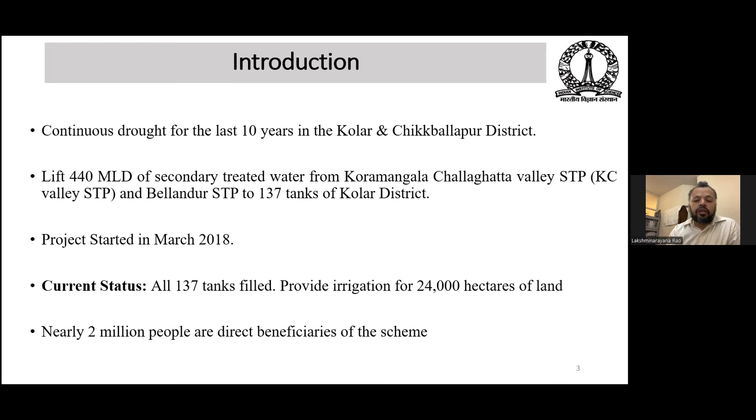Nearly 2 million people are direct beneficiaries of this scheme. There's a big impact because water has been flowing there, and it has had a big impact on the people. So what is the scheme?

There are two STPs here in Bangalore. Water is pumped through a pipe network to this first discharge chamber called the DC point, which is about 100 kilometers away. From then on, it either flows through gravity, or wherever gravity is not possible, they pick up the water from here and bring it to the highest point.

Most of the water flows in open channels starting from this DC point. Wherever such options are not available, it is pumped in pipe networks, brought to the highest point, and from there it flows in open channels from tank to tank.

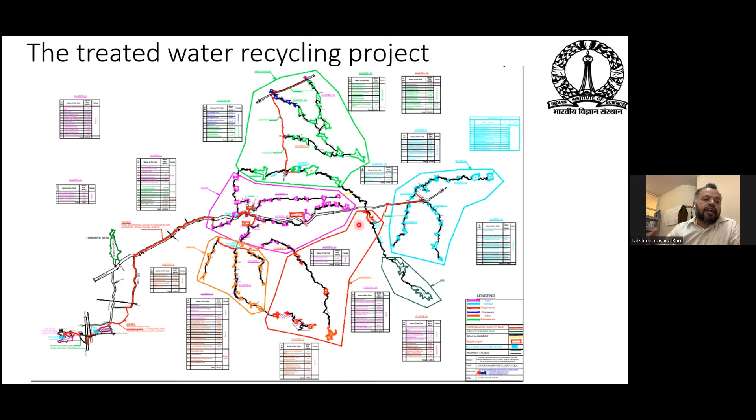The project is located - here is the map of India, we are in Karnataka, and in Karnataka there is this district called Kolar. A major portion of Kolar is fed with this treated water, which is stored 24/7, 365 days of the year. So water is available, and you can imagine the impact this has on the groundwater table.

The objective of this project is to ensure that this water, stored in these tanks, is used for indirect recharge of the groundwater table, not for direct use. A lot of precautions were taken to educate people that this treated water should not be consumed directly, but should be consumed after being picked up from bore wells neighboring these tanks. Here is a picture of that.

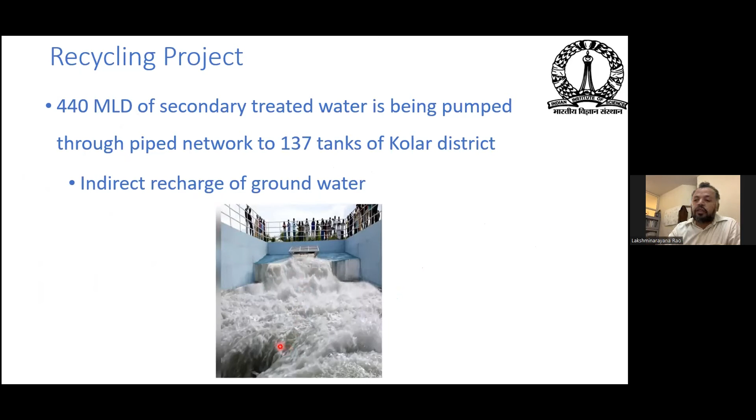So this objective, as I said, is indirect recharge of groundwater. This is the DC point, the discharge chamber, and you can see the treated water flowing from one tank to the other. These are some pictures of tanks before - that is the first tank, called the Lakshmisagara tank, and this is how it looked before the water had arrived.

So it was completely dry. Here is the DC point, you can see on the picture on the right, and the water is flowing and filled up in this tank. The overflow from this tank goes to the downstream tank, and it continues that way. So in this picture you can see the first tank, another tank, the third tank, the fourth tank and the fifth tank. It keeps moving from one tank to the next, and depending upon the capacity of the tank, the residence time of the water in these tanks is different.

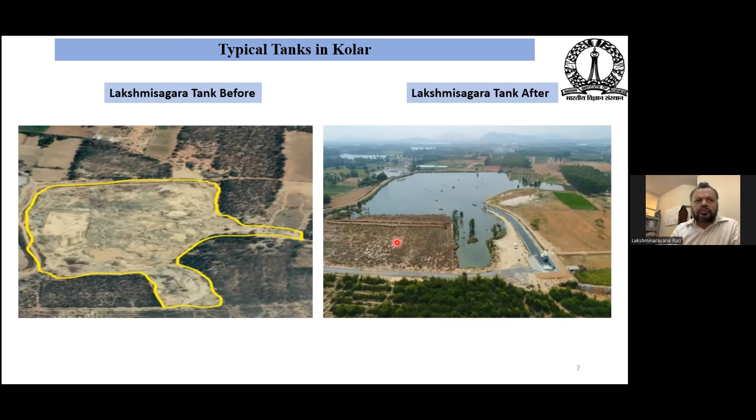This helps natural groundwater percolation and eventually increases the groundwater table, and also the quality of the underground water. Here is another picture where you can see some lilies growing in the tanks.

What was the standard of quality of the water being filled? When we started this project, there were 2 STPs, and the STPs were not up to the mark. This was a discharge standard set by the National Green Tribunal for the discharge of treated water to surface water bodies. They were really concerned more about the nitrogen and the phosphorus. So the standard was total nitrogen should be less than 10, and total phosphorus measured as PO4 should be less than 1. That was the very strict standard set, obviously to avoid eutrophication of these tanks.

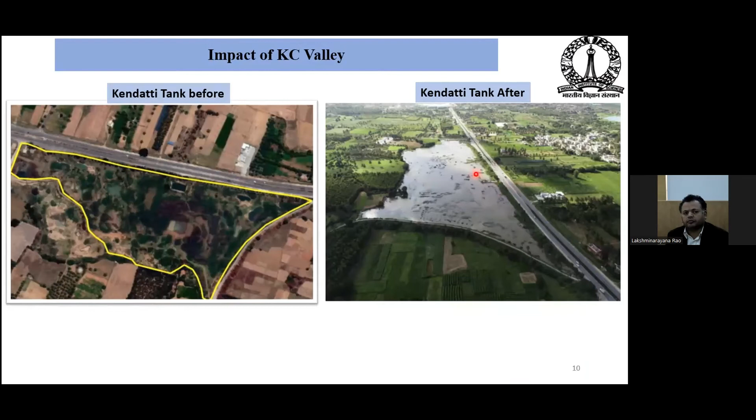One more picture of another lake, Kendatti Lake, before and after. Here are some of the pictures of the impact of the KC Valley project on the flora and fauna.

So the tanks are now filled with treated water, because of which the underground water table has increased, because of which a lot of migratory birds have come back, and it is promoting tourism.

People have stopped growing eucalyptus, which was being grown, has been uprooted. Now people have gone back to growing vegetables. Instead of having 1 crop per year, now they are having 3 crops - the farmers are doing 3 crops per year. They are back to growing flowers, vegetables, fruits, and even paddy is starting to grow, which is a water intensive crop. So these are also being grown.

Some more pictures of it, some herons. These tanks are also auctioned off to the fisheries department so that they can do fish cultivation in there. So people are also doing fishery in these tanks.

What you see here is the change in groundwater levels because of the storage of water in these tanks. What you see on the x-axis is the number of years - we have monthly borewell data. This is from a borewell which is close to Narasapura, which is one of the 5 tanks in this cluster.

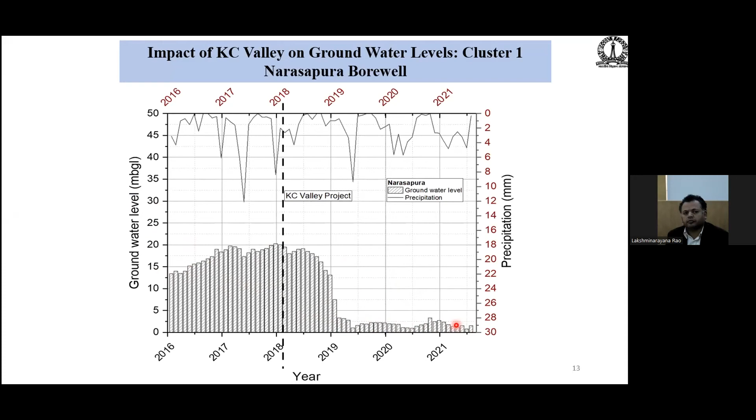And this water remains constant for all the months of the year. So there is no change in the water level, indicating that the groundwater is being continuously charged with the water which is stored in this tank.

Before this project, there were areas in Kolar which were more than 2,000 feet below. People were picking up water from as deep as 2,000 feet, so they had multi-staged pumps which they were putting in to pick up water from those depths. The cost of water was very high because they had to pick it up from such deep levels. Also the water quality was very hard, so they were getting a lot of dissolved salts in that water because they were picking it up from such low levels.

Now the water quality has improved. I don't have the monthly data yet, but I've seen some data which has just started to come in. The water quality has also improved because of the dilution effect coming in from this KC Valley project.

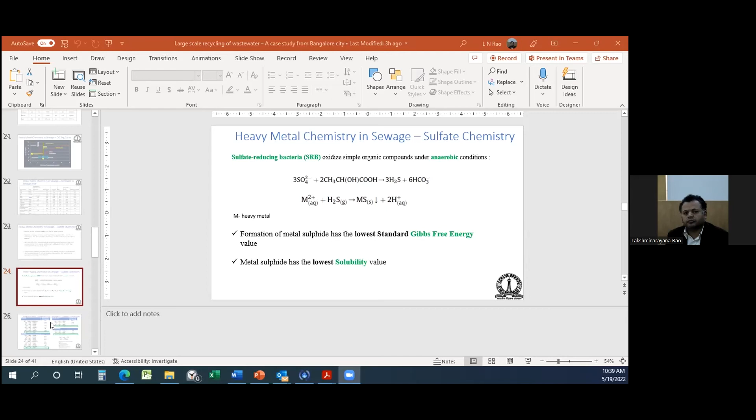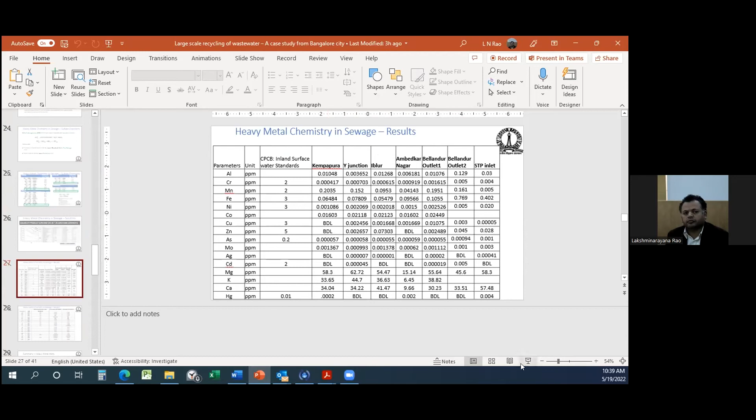We went ahead, and here is one example of that sulfate reducing bacteria doing it. Then we went ahead and really showed it for all the inlets. These are all different points. What you see here, I'll just show this one, you can see here for all the heavy metals which are listed in the inland surface water standards. We showed that even the raw sewage coming in will be very, very low, and the STP inlet itself will not have, and the STP outlet definitely will not have, any heavy metals. So this was shown to the courts, and they agreed, and then they started letting the water in.

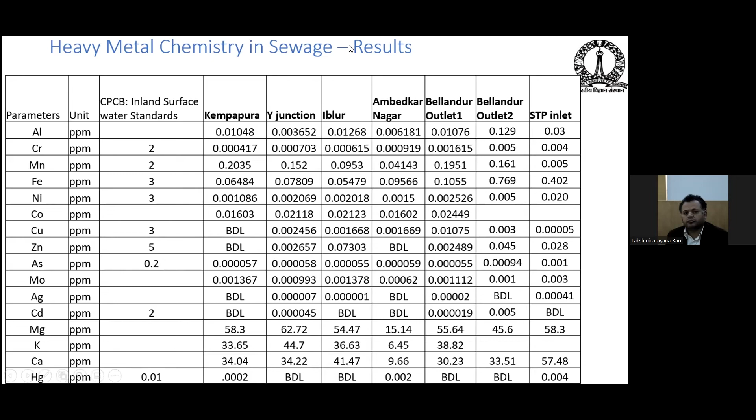Once the water started flowing in, once they began seeing the advantage of this project, now there is a lot of demand for the water. So there is a lot of internal fighting, theft of water, all kinds of stuff happening to really get more water from it. So the challenge was the initial apprehension that this water might not be very good and might contaminate their groundwater. Once that apprehension is removed, now the challenge is how do we manage it, because they want more water. Everybody wants water, and now people are doing all kinds of stuff to steal this water, divert channels, put bunds, and all kinds of things. Everybody wants water now. The government also recognizes that, and now they are embarking on phase 2 to fill 272 tanks, which will start in the next year or so.

Dr. Rao, it would be great to also answer a few more of the questions, because we have several coming in. There is one question about whether there is a charge to the villages for the pumping. No, the pumping is free, so there is no charge.

Even as a matter of fact, there are two government departments associated with this. One is the Minor Irrigation Department, who are in charge of picking up the water from Bangalore and delivering it to the tanks of Kolar. Then there is another department called the Bangalore Water Supply and Sewerage Board, who are responsible for collecting the wastewater from Bangalore city and treating it. So there is a lot of argument that the MI department should pay some fees to BWSSB to treat this water. But the government has said, okay, we are in the same umbrella. We don't pay for fresh water coming in from Mysore, where drinking water is picked up. So water is free, nobody pays, no charge.

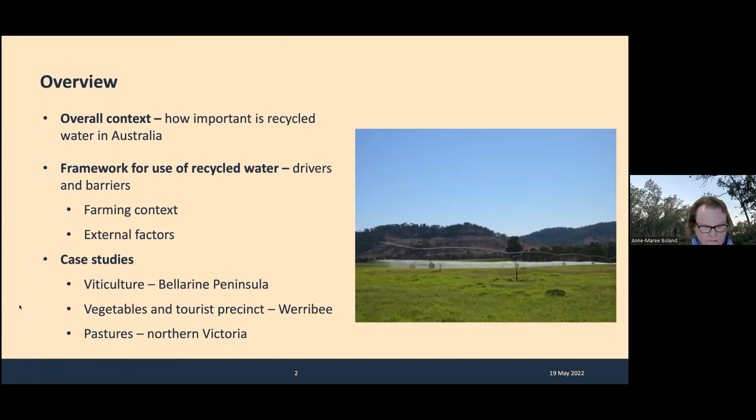So just to touch on - first of all, sorry, I'm just having trouble getting it to go to the next slide. Okay, just to touch on recycled water in Australian agriculture.

We have a very large and significant irrigated agriculture sector, and a lot of that is from either rivers, surface water, but also groundwater, and we have large irrigation schemes. The total volume of irrigated agriculture water used in the last ABS accounts, which was 2019 to 2020, was about 7,230 gigalitres. This has been declining over time, particularly with a lot of that water moving to higher value crops. So you can see from 2014 to 2015 up to now, there's been quite a decrease in the amount of water that's been extracted from the environment, and also delivered in our irrigation systems.

If we think about the recycled water side of things, we have about 312 gigalitres of treated effluent that's been supplied, and of that only about 86 is going to agriculture. So if we look at that volume plus the industrial sources of wineries and milk factories, which also have water that is reused, it really only represents about 2% or less than 2%.

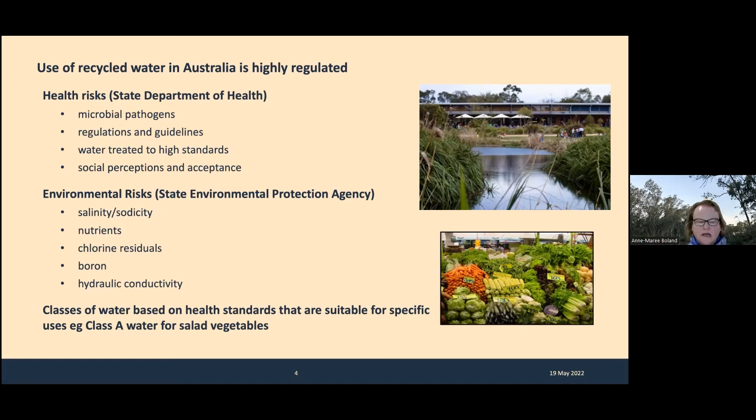Using recycled water, whether from treatment plants, dairy processing or wineries, requires additional management. As I mentioned, from an agronomic point of view, salinity is really the significant one. We also need to manage the nutrients, mainly nitrogen and phosphorus, and in addition we often have to consider on-farm storage.

For a lot of the work we've been doing over the last 15 to 20 years, we've been producing guidelines to assist farmers when using recycled water. These are just two examples that we have around horticulture and also pasture and fodder crops.

One of the things we need to think about when looking at a recycled water scheme is what are some of the drivers and barriers to using recycled water. This is very complex, and I'm not going to go through all of the points listed in this slide, but there's a whole lot of things considered by farmers, both from a farming context point of view, but also by the broader community and government around some of the external factors.

If we think of some of the social factors, we're looking at the individual's personal values, their attitude to risk, what they want to do with their farm in the future. And a lot of these farms happen to be situated around the major cities.

We have two important water resources, the Arkavati and the Kaveri. Unfortunately, the Arkavati source is almost redundant — we are not getting any water from there. As a result, we depend only on the Kaveri source, from where we have implemented several schemes, from stage 1 through stage 4, phases 1 and 2, and now we are going for stage 5. In total, we are getting about 1,440 million liters of water only from the Kaveri scheme.

In addition, we are getting roughly 500 million liters of water from groundwater. India is the largest extractor of groundwater in the world, and Bangalore is also extracting a large quantity, almost 500 million liters. A recent report from the Ministry of the Government of India says 20 cities are going to exhaust their groundwater potential. So in total, about 1,900 to 1,950 million liters of water is being extracted from surface and groundwater sources.

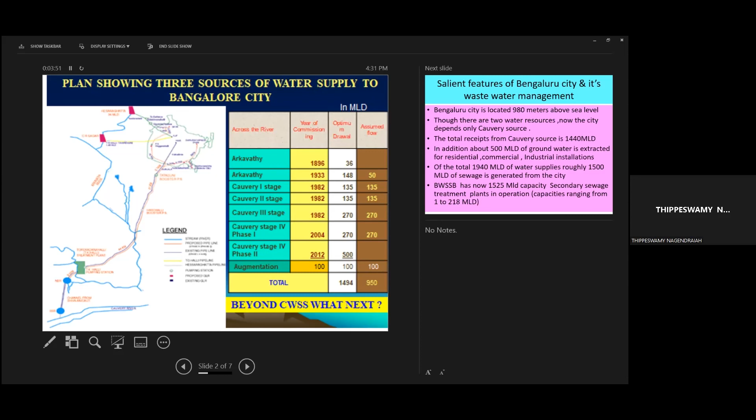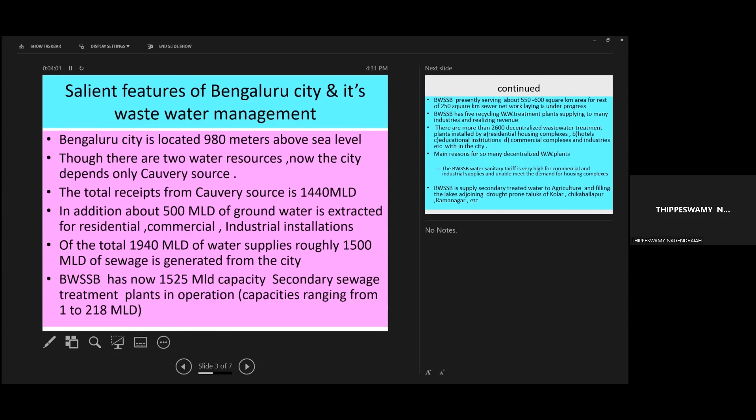We are generating about 1,500 million liters of sewage, at the rate of 80% of water coming out from usage by various users like residential, commercial, and industrial consumers. BWSSB has already installed 1,525 MLD capacity treatment plants, which are already working.

These are all plants with secondary treatment capacity, and only 5 of them have tertiary treatment, where we are supplying treated non-potable water to industries, and also to many areas including the airport, etc.

The main important thing I would like to add is that, in addition to these 5 plants constructed by Bangalore Water Supply and Sewerage Board, there are more than 2,600 decentralized sewage treatment plants installed by various commercial and housing complexes, including the Indian Institute of Science and commercial complexes.

I think these 2,600 decentralized plants are treating almost 140 to 150 million liters of water. Most of them are working, though reports from the Pollution Control Board indicate almost 25 to 30% are not functioning, while the rest are functioning.

These are now critical, because the availability of water in Bangalore city at 1,440 is inadequate. Because of almost 38 to 39% wastage and losses in the system, what is really available is only about 1,200.

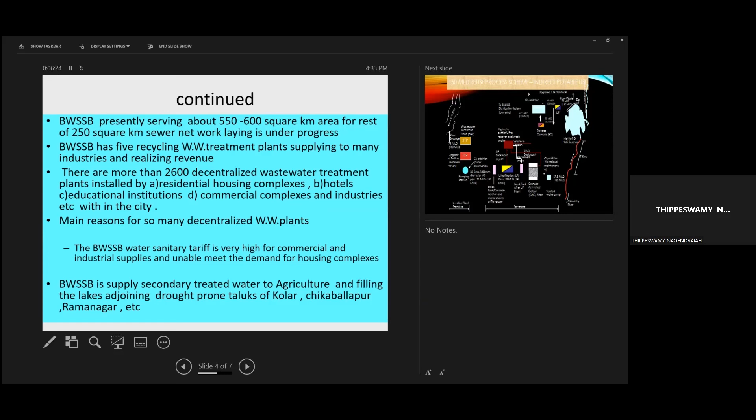This is one of the proposed plans for indirect potable reuse, similar to what has been done in Singapore or Brisbane. This is very much called for because we don't have any real water resources close by. We have exhausted the one perennial source, the Kaveri, and we are now seriously looking at this solution—the wastewater generating from the Vrishabhavathi Valley is more than 500 million liters.

From this we want to treat 150 million liters of water and bring it to the Arkavati source, the Thippagondanahalli source, which was also supplying water for Bangalore city until 1974. We want to dilute it, treat it again, and send it to Bangalore city.

This is the project which is almost approved by the Government of India, and it's probably going to take a lead in the days to come. If we want to go for any additional resources from a perennial source, we have to go almost 300 to 400 kilometers to get that, and there are also a lot of agitations going on regarding tapping water from those places.

So we have to seriously look at wastewater as one of the important resources for augmenting water supply to Bangalore city, following what has been done in many other developed countries like San Diego, Los Angeles, and Texas, which are going for direct potable use. In my opinion, in the days to come we are seriously looking at not even indirect potable use, but we have to go for direct potable use.

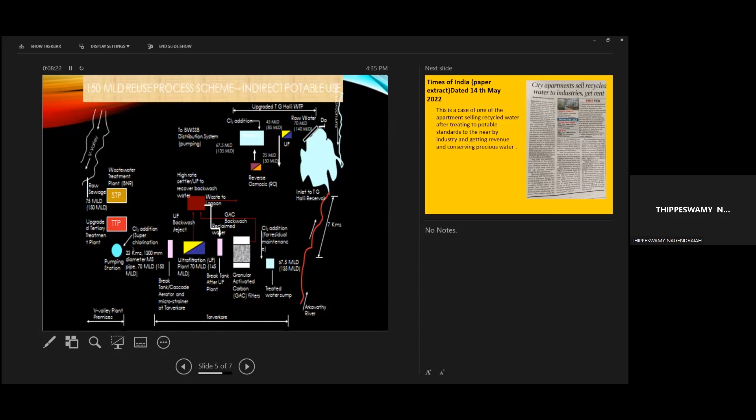Next slide, please. Here is a case shown just a few days back, last week only—apartments recycling water being supplied to industries. One of the important apartments is treating water to high standards with RO and selling this water to industry.

So, coming to the way forward—the challenges before the authority to meet the demand of water for the growing population: there is no more perennial resource to augment water supply to the city. That's exactly what it is meant for. We don't have any resources. So what is next to be done?

Authorities need to seriously think of using wastewater, which is black gold in Australia, for potable purposes, either through direct or indirect potable use, similar to other developed countries like Singapore, Brisbane, San Diego, and Texas. There is no groundwater availability since the city has only rocky terrain. Using all forms of water is inevitable, such as grey water, storm water, and wastewater. Conservation of water and efficient management measures are the need of the hour. Recovery of not only water but also untapped resources is a must, such as energy from methane and phosphorus, and also to meet the circular economy.